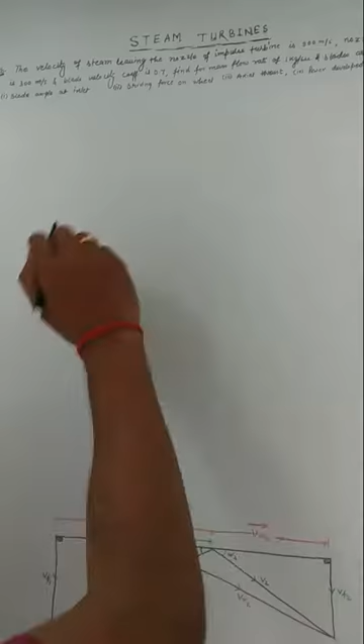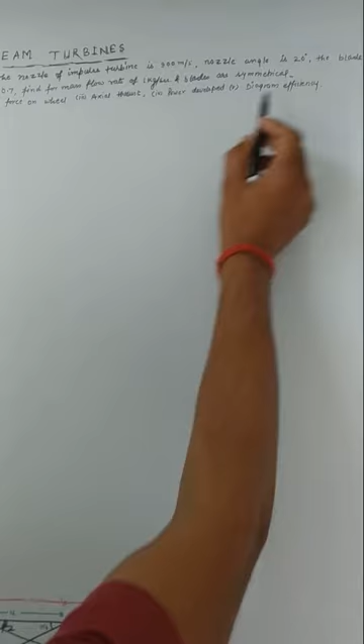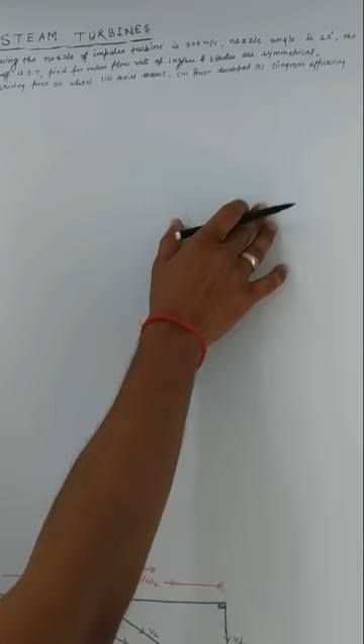The problem is: the velocity of steam leaving the nozzle of the impulse turbine is 900 meter per second and the nozzle angle is 20 degrees. The blade velocity is 300 meter per second and the blade velocity coefficient is 0.7. Find the mass flow rate of 1 kg per second, and the blades are symmetrical. This is the condition given in this problem. Find these values for this problem.

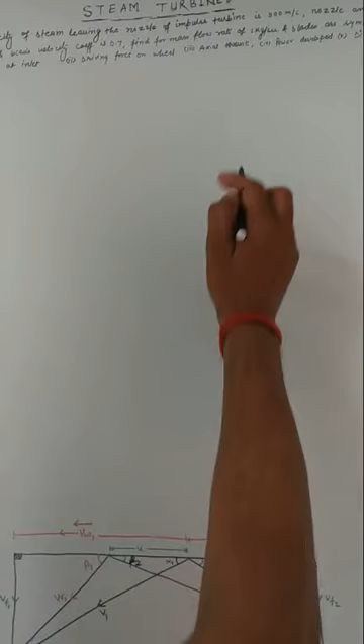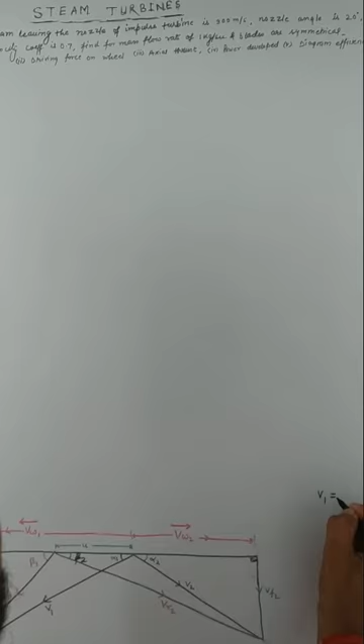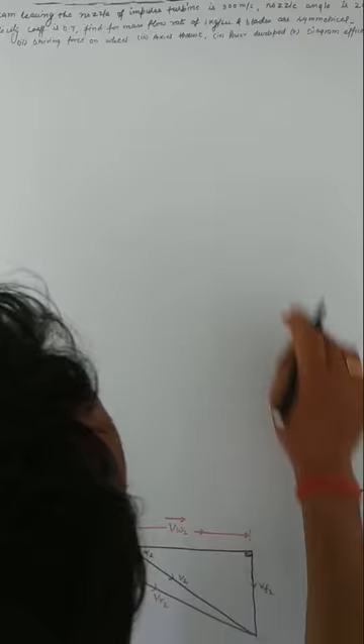First of all, we have to write the given data. For the impulse turbine, the absolute velocity of the steam leaving the nozzle is V1, which is 900 meter per second. Nozzle angle, that is alpha 1, is equal to 20 degree. The blade velocity, the linear blade velocity, is 300 meter per second.

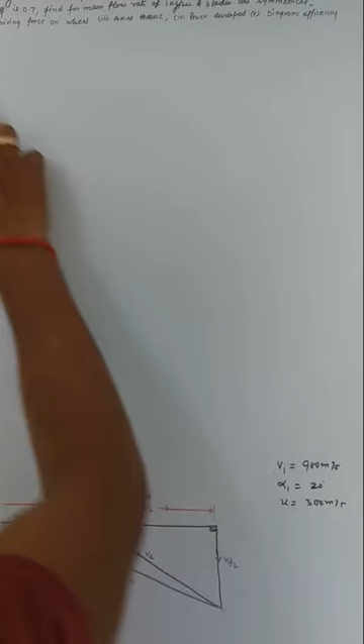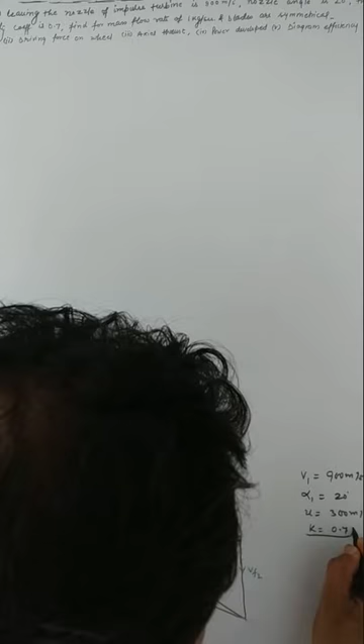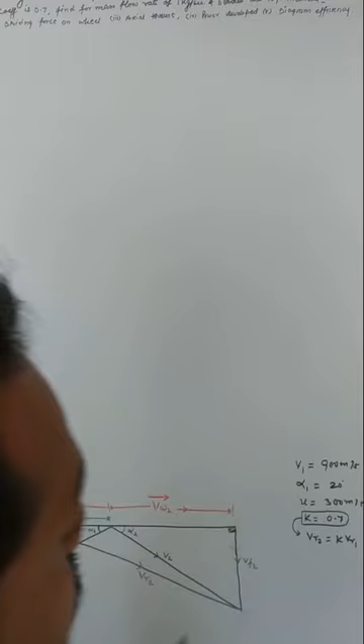Next, blade velocity coefficient, that is K. K is 0.7. This is used because blades have friction. That means VR2 is equal to K times VR1. And mass flow rate is 1 kg per second.

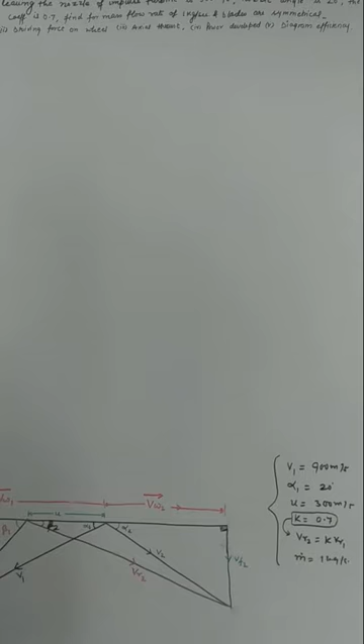So now, for this given data, we must draw a velocity diagram for the impulse turbine.

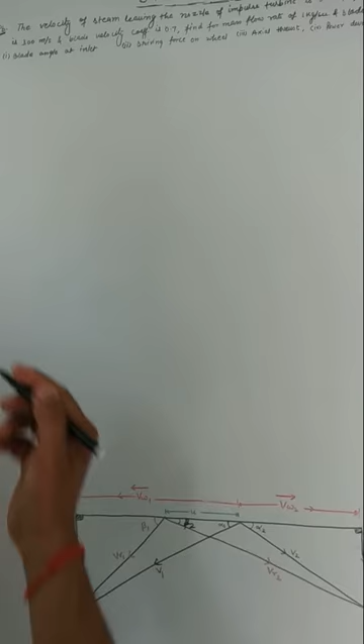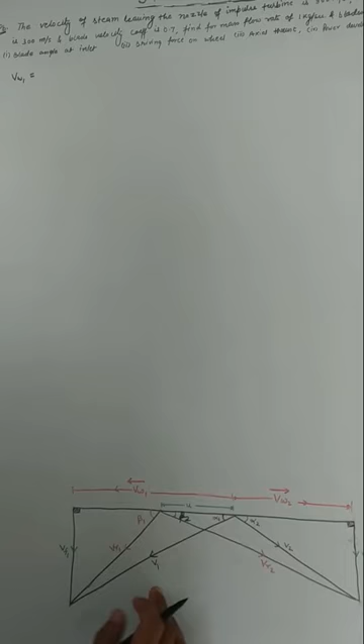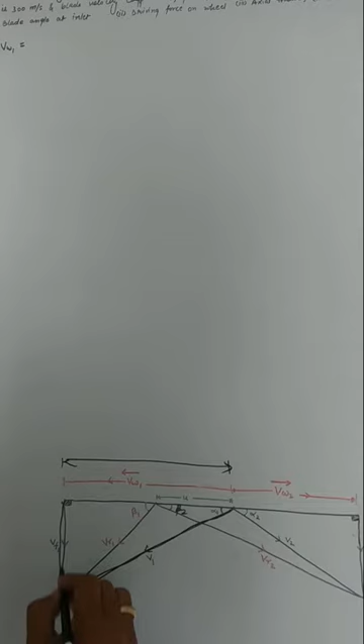Now first of all, we have to write the velocity components using these velocity triangles. VW1 can be written as, from this velocity triangle, VW1 is this one. So from this triangle, we can write alpha 1.

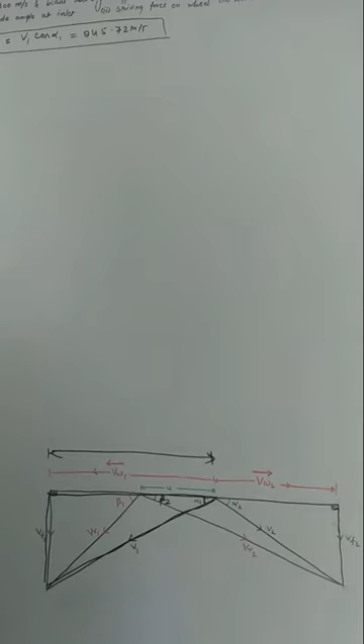VW1 is equal to V1 cos alpha 1. We have V1, we have alpha 1. Put the value in this equation and we will get 845.72 meter per second. This is the whirl component of the absolute velocity at the inlet to the moving blade.

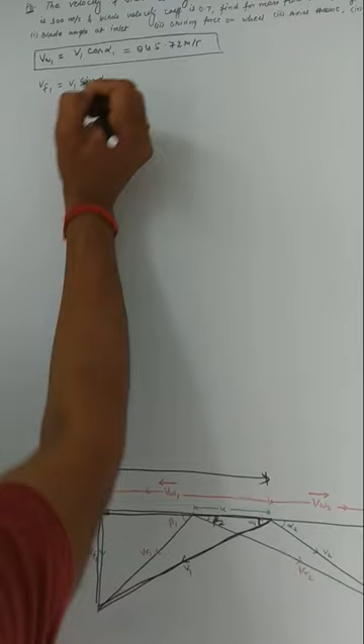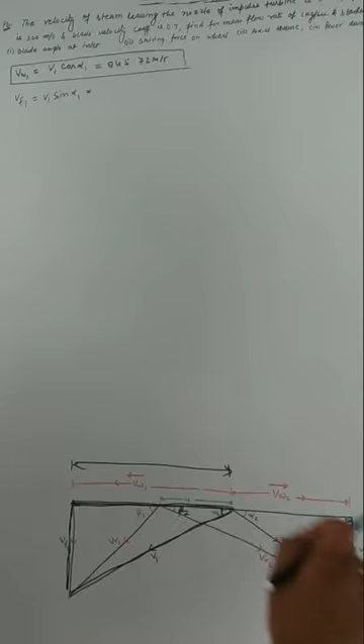Now we can also write VF1, the flow component. VF1 is equal to V1 sin alpha 1. Using sin alpha 1, from this bigger triangle at the inlet, sin alpha 1 is equal to VF1 divided by V1. From there we can write VF1 is equal to this expression. We know V1, we know alpha 1. Put the value in this equation and we get VF1 is equal to 307.81 meter per second.

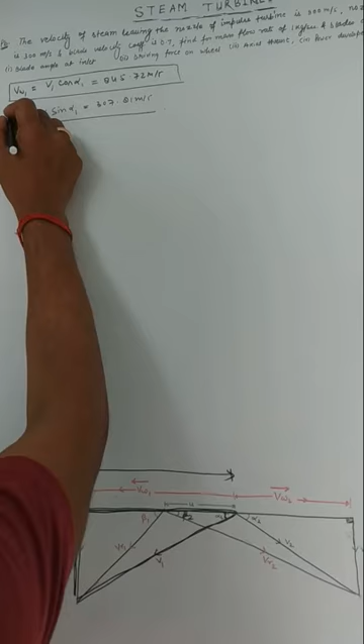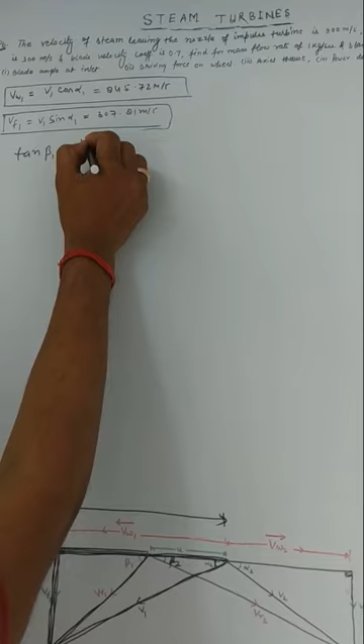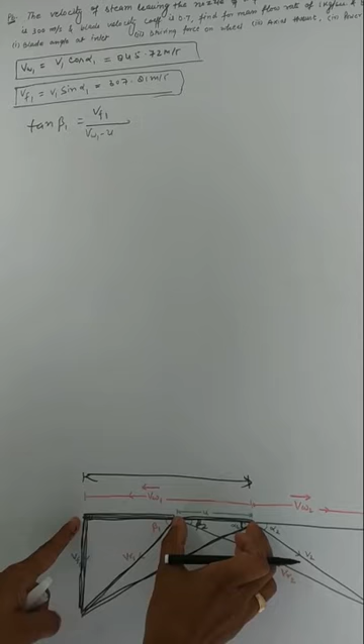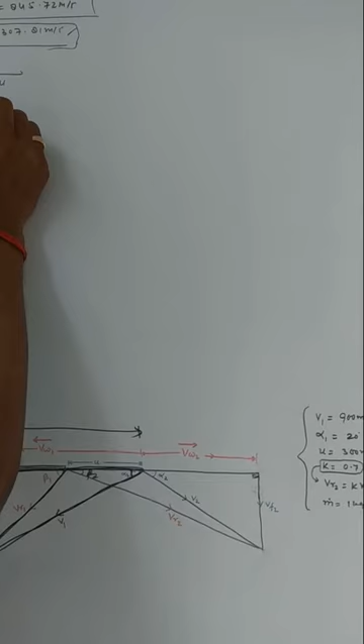Next we can also write beta 1 using the small triangle at the inlet. From this triangle, tan beta 1 is equal to VF1 divided by VW1 minus U. So from there we can calculate beta 1 is equal to tan inverse of this. We have VF1 calculated, VW1 calculated, U is given. Put the value and you get beta 1 is equal to 29.42 degree.

This is your first answer: the blade inlet angle, that is beta 1.

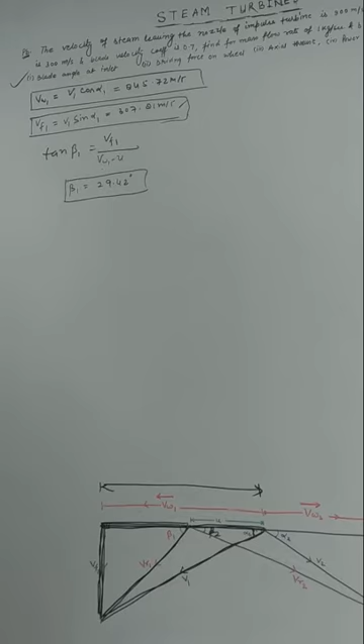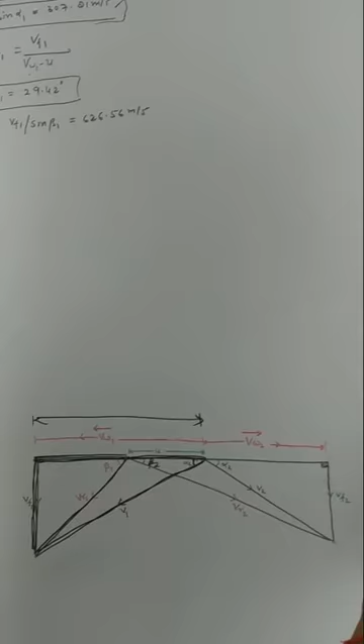Now we can use another velocity triangle with beta 1, and we can write VR1 from this beta 1 triangle as VF1 divided by sine of beta 1. We know VF1, we know beta 1 now, and putting the value we get VR1 is equal to 626.56 meter per second. Now we know that VR2 is equal to K times VR1. VR2 is equal to K which is 0.7 times VR1 which is 626.56, equal to 438.59 meter per second. This is VR2, the relative velocity at the exit.

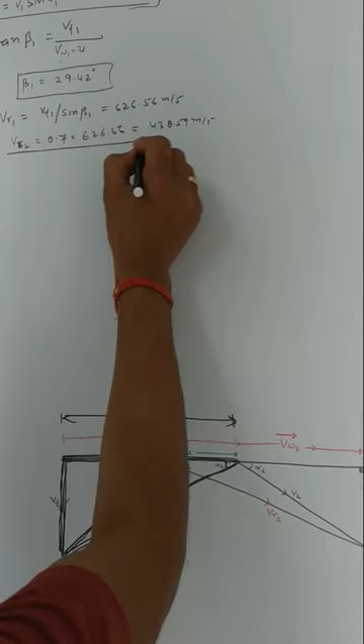Now we can calculate VW2. VW2 can be written as VR2 cos of beta 2.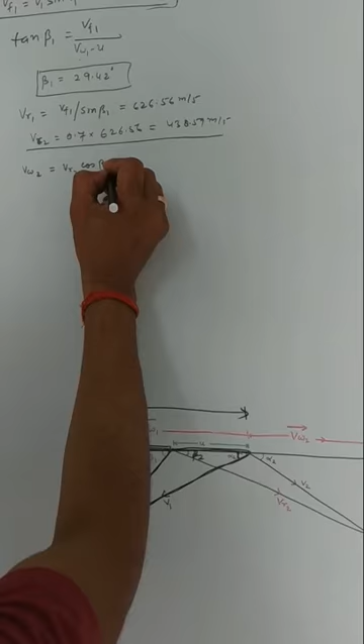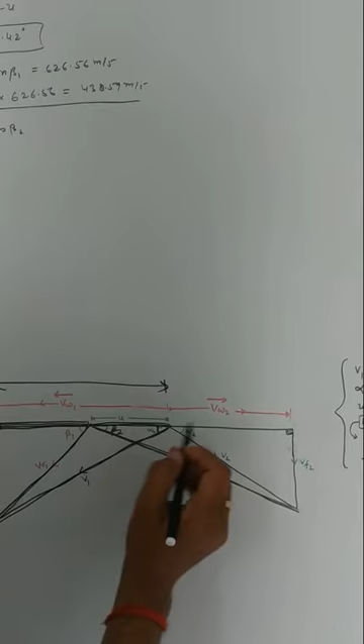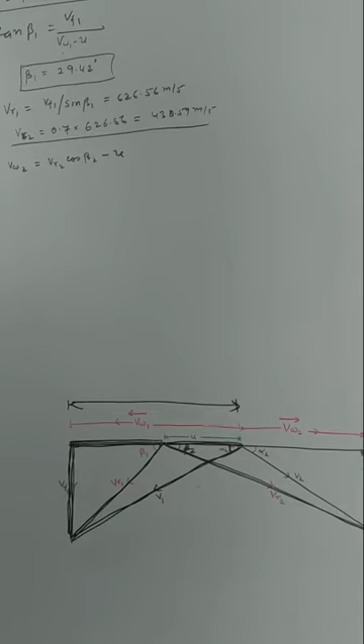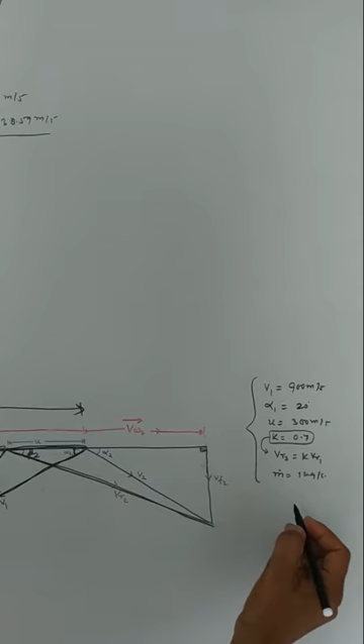VR2 is given as K times VR1, and VR1 we have calculated. So VR2 we know. Beta 2 is equal to beta 1 because the blades are symmetrical. That's why beta 2 is equal to beta 1, so we replace beta 2, VR2 cos beta 2 replaced by beta 1 minus U.

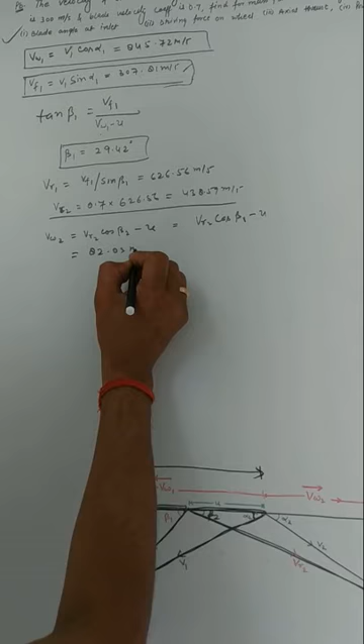We know VR2, beta 1 and U, all we have right now. So put these values and we will get 82.03 meter per second. This is VW2. Now we have all the velocity components.

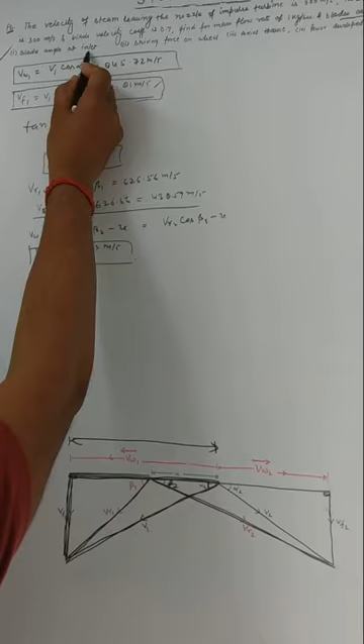First answer is blade angle at the inlet. Blade angle is denoted as beta 1. Beta 1 we have calculated, since in this problem it is given that beta 1 is equal to beta 2 because the blades are symmetrical. That's why inlet angle is also equal to exit angle beta 2.

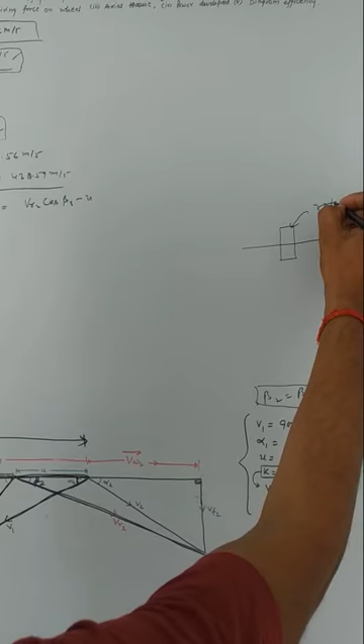Second question is driving force on the wheel. Driving force on the wheel, because wheels are mounted on the shaft. Wheels are the rotor, this is the rotor. This rotor is rotating, this is the shaft axis. So the force which is responsible for the rotation of the rotor, that is the driving force, and the force is F.

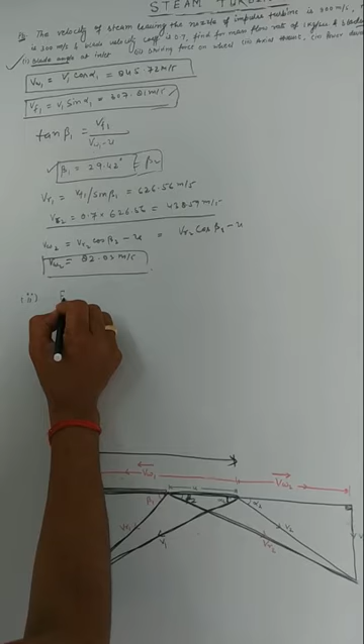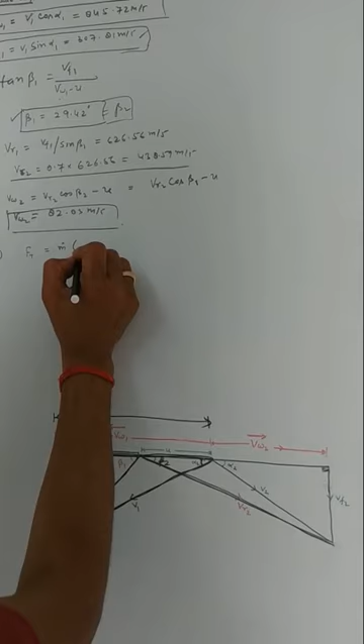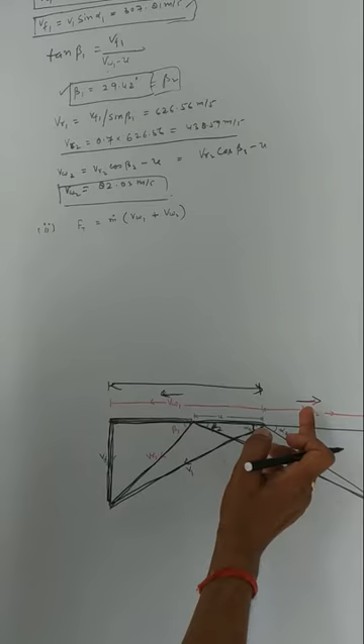Tangential or whirl component. The whirl component, tangential force is equal to mass flow rate multiplied by VW1 plus VW2. VW1 and VW2 are in opposite direction, that's why it is minus VW2, because VW1 is in this direction and VW2 is in this direction. So you are writing the change in velocity, this minus this, that's why minus minus plus.

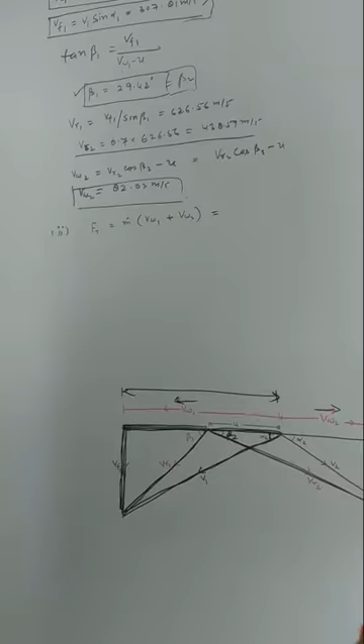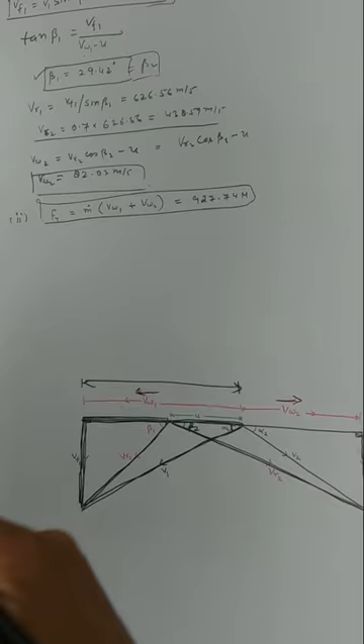So for this tangential force, you write the values in this equation. M is given, VW1, VW2 we have calculated, put the value and get 927.74 Newton. This is the tangential force required to rotate the wheel or rotate the rotor. This is the driving force. The force which is responsible for the rotation of the rotor is the whirl component of the moving blade, whirl component of the actual absolute velocity.

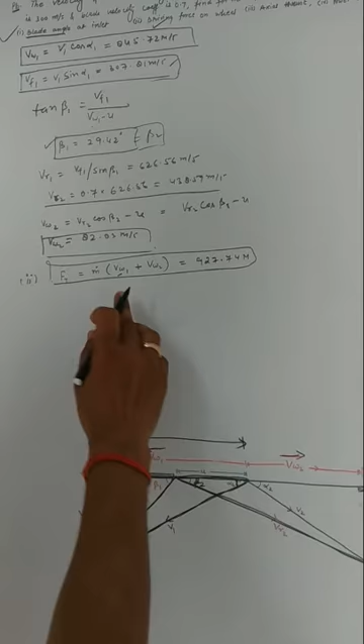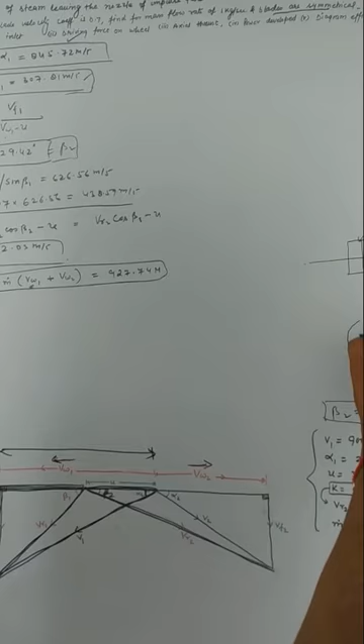This is the third part, axial thrust. FA, axial thrust or axial force. Axial thrust or axial force is, because we know that impulse turbine or even steam turbines are axial flow turbines. We have drawn the velocity component at the inlet and exit both.

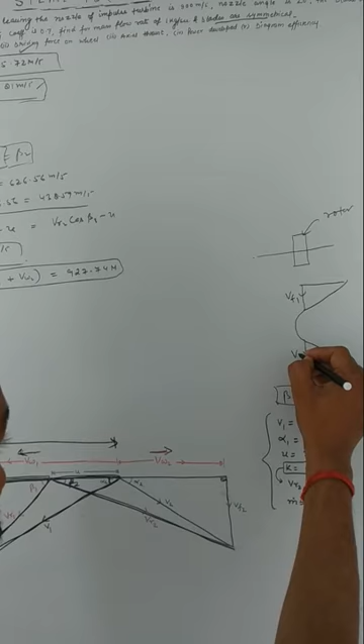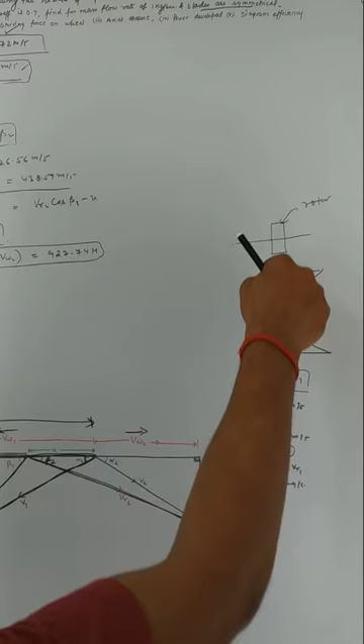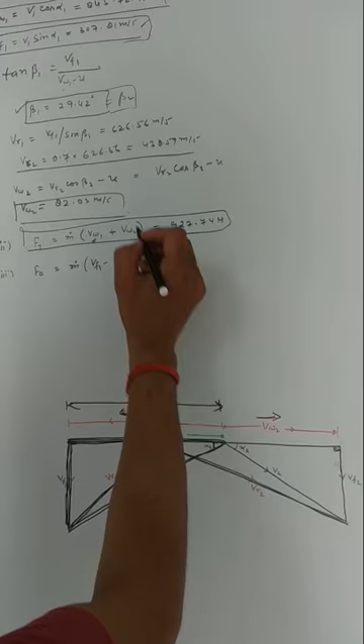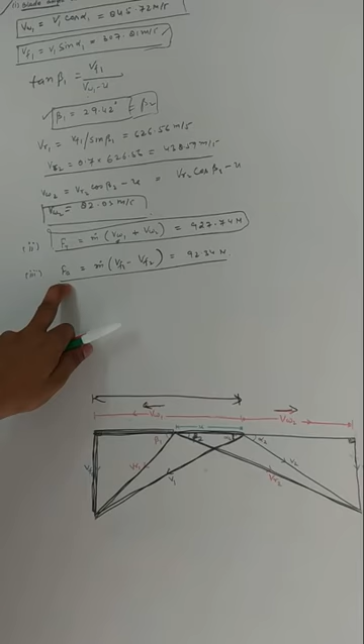This is VF1, this is VF2, this is the flow component of the absolute velocity. The direction of VF1 and VF2 flow component is the same at inlet and exit. That's why the change is m dot VF1 minus VF2. VF1 and VF2 are already calculated, put the value and we will get 92.34 Newton. This is the axial thrust or axial force or flow component.

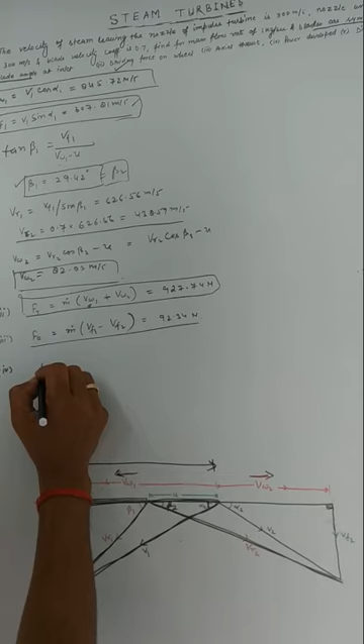Fourth part, power developed. Power, we have the formula: power developed is given by mass flow rate multiplied by VW1 plus VW2 into linear velocity. All we have the data, and after putting the value we will get...

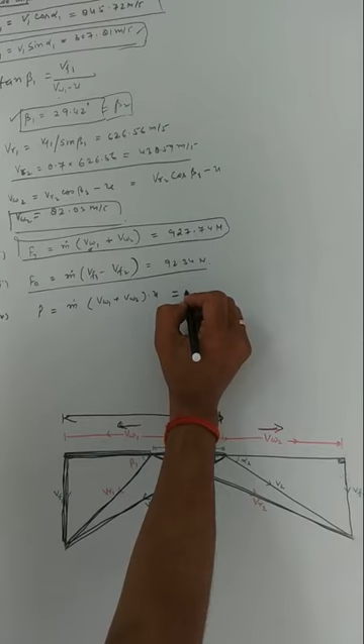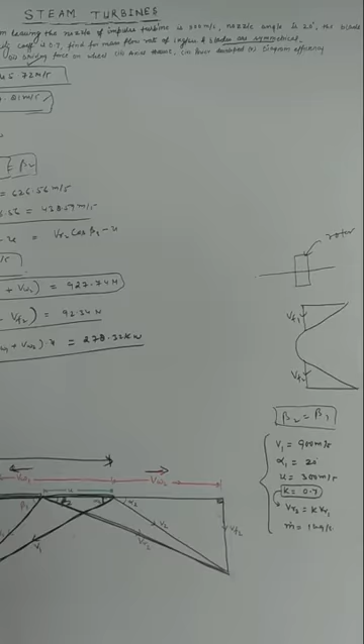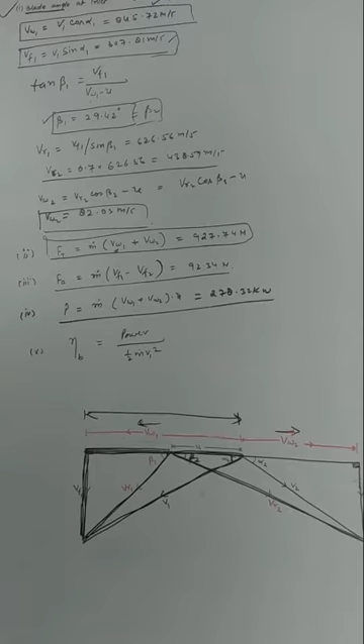278.32 kilowatt. Last part is diagram efficiency. Diagram or blade efficiency is given as power developed divided by energy supplied. Energy is half mv1 square. So power, we have calculated power, is written as VW1 plus VW2 into U divided by half mv1 square

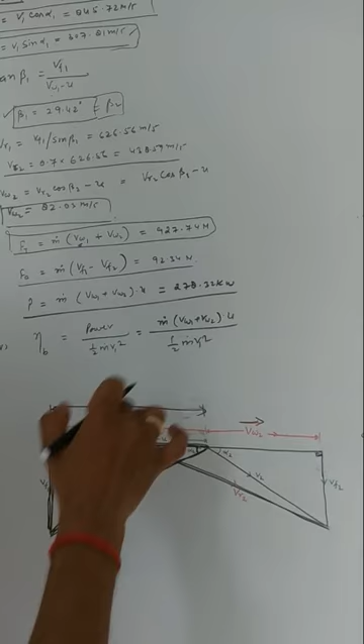which is the energy supplied. This is the blade or diagram efficiency, and we have all the values in this equation. So putting the values, all the velocity components we have, so we get 0.687. You can write efficiency as 68.7%.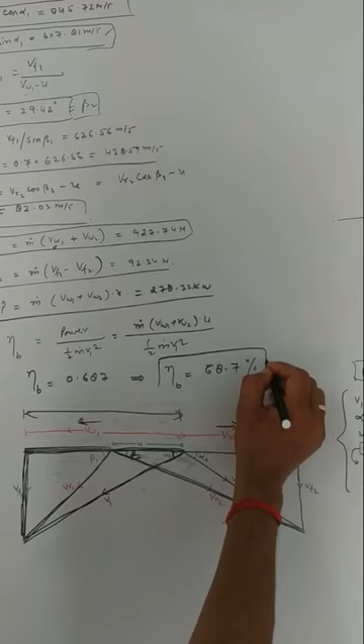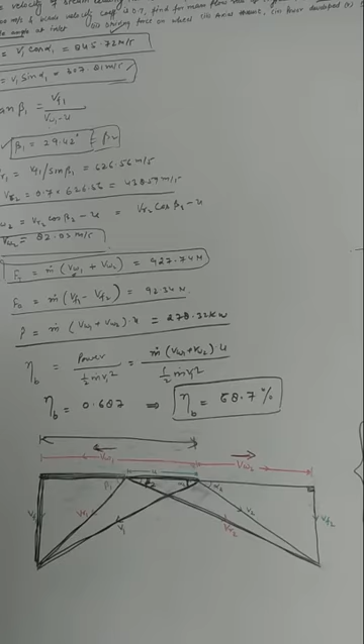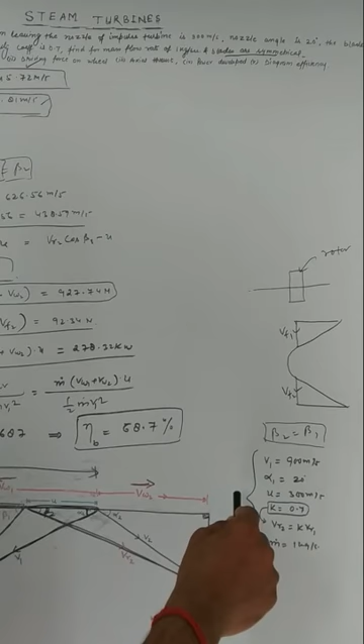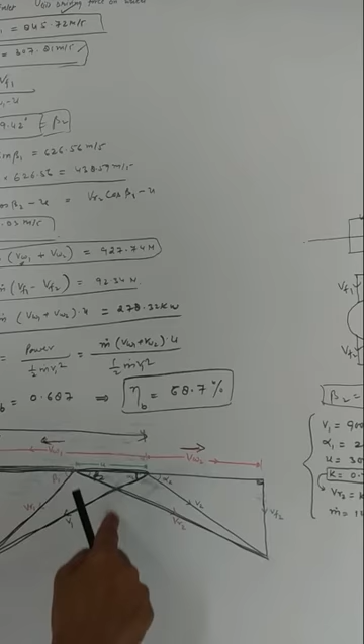So all the parts we have done. You see in this problem, or you can say for solving the problem of an impulse turbine, the major fact to remember is that when the data is given, you calculate all the velocity components from the given data using the velocity triangles at the inlet and exit as per the requirement. Then we can write each and every force, power, and efficiency.